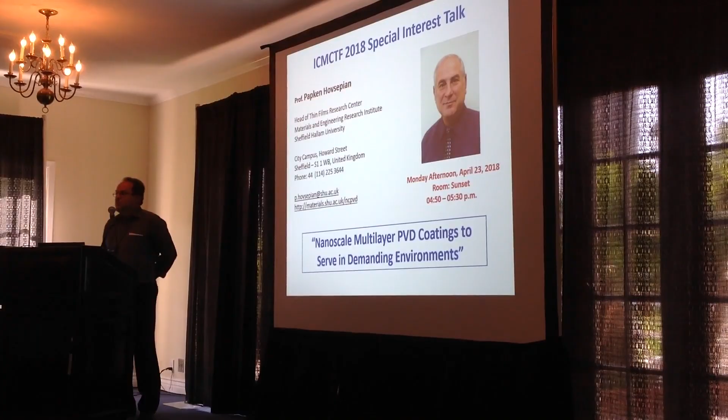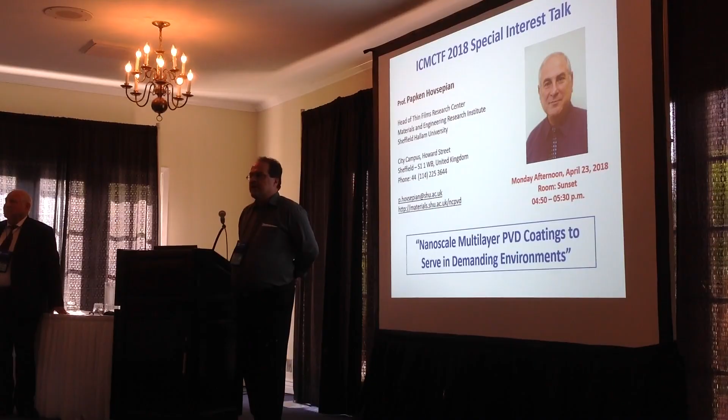Good afternoon, ladies and gentlemen. It's my pleasure to welcome you to this special interest talk to be presented by Professor Papken Hovsepian. I outlined this morning a little bit in the opening ceremony about these interest talks, a new feature at ICMCTF, and you will see if you follow us throughout this week what we mean with these talks. We have a diverse approach, multiple different talks and different topics.

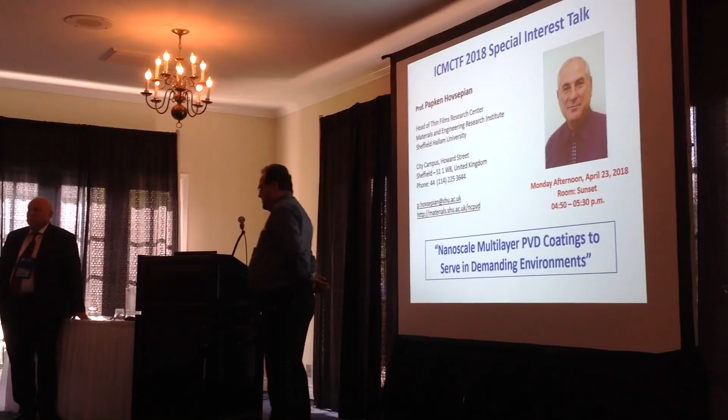And one aspect of these special interest talks is to highlight and recognize colleagues that have done pioneering work in fields of interest to ICMCTF, who have done outstanding service to ICMCTF and have an impact on our research community. And this holds absolutely true for Papken Hovsepian. Papken is truly a pioneer in physical vapor deposition. He has more than 30 years experience in this field. He has done significant work on cathodic arc evaporation, on magnetron sputtering. A special interest of his work was always the development of hybrid deposition processes, combining the different methods.

And I would say, in a personal estimation, his impact on the work on the pulsed deposition processes in the last 15 years, together with Harry, of course, and other colleagues, is significant, and pulsed deposition would not have reached the level it has today without it. Papken is professor and head of the Thin Films Research Center at the Materials and Engineering Research Institute in Sheffield Hallam University in England. And when he came in 1997 to this institution, he was very soon a foundation and solid rock on which other colleagues, and especially here in our field, Wolf-Dieter Münz, could build on.

And together, these two pioneers have published seminal papers on nanoscale multilayer thin films and superlattice thin films, on transition metal nitrides and other material combinations. And if you look on these papers, you will find that already 20 years ago, these colleagues, and especially Papken, anticipated a lot of what we talk about today regarding interface engineering in multilayer materials.

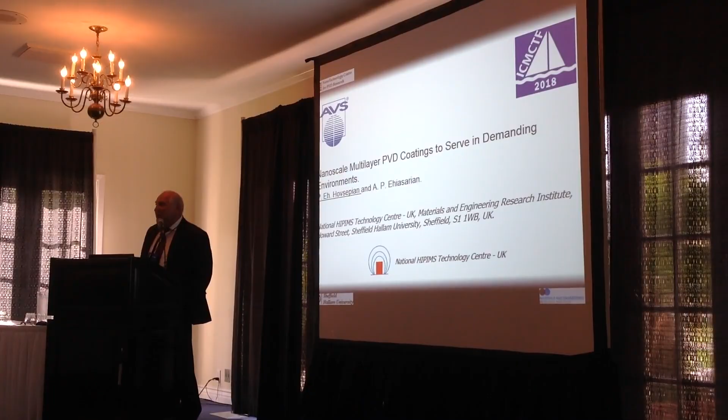I'm in the field 40 years, not 30 years. I was a student when I started with PVD for some reason, and it stayed with me all my life. So it is true that I always worked in the field of applied research, and I'm not ashamed of that. I like seeing results being implemented in industry. And what I will do, I will try in the next 40 minutes to keep you, of course, entertained, but also to show you the pain we went through to develop some of these materials, which were postulated a long time ago as super materials, and the results which we have achieved in this field.

So the title already says that these are coatings which will work in demanding environments, and the environments which I will touch include lead corrosion, room and high temperature oxidation and corrosion resistance, interaction with workpiece materials during cutting, and interaction with the human body. So it's a very wide range of environments, and one has to have a specific approach.

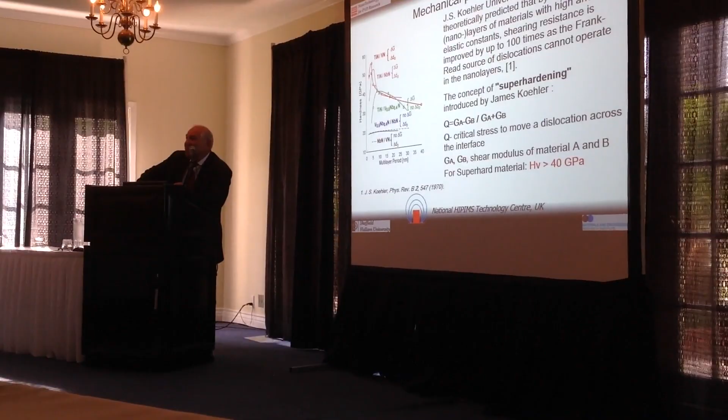Around 1970, I think James Koehler was the first person who introduced the theory behind the super lattices. And the theory was that if you marry two materials with different elastic constants, then you automatically create a barrier for the dislocation motion, and the energy they need to cross this barrier is proportional to the difference between the elastic moduli.

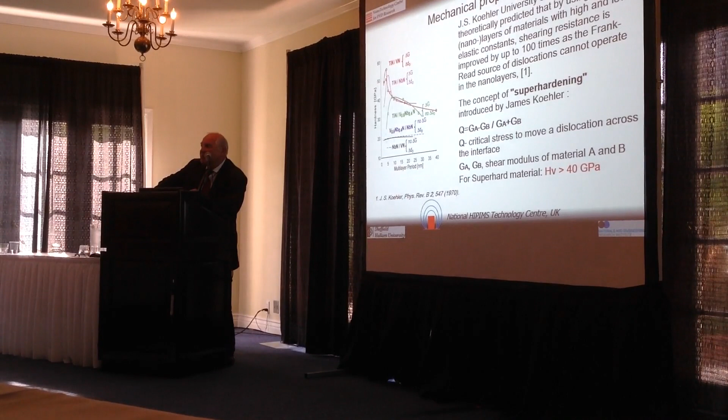So it was a really interesting concept because this gave in our hands the tool to manufacture man-made new materials. And it was demonstrated that a huge hardness enhancement can be achieved in a specific bi-layer period range.

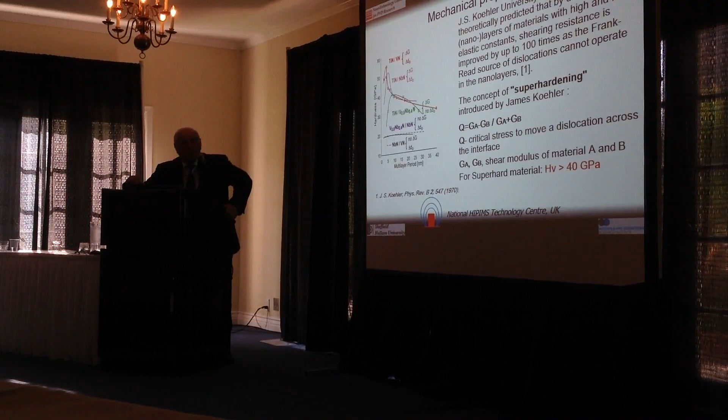Now this was the attraction for many years, and the goal was always to get harder and harder materials. The super hardness as a term was introduced, and everything which is 40 gigapascal was named super hard.

Now the theories which explain this, and there was a huge amount of research which I'm not going to touch deeply, but I selected just 4 very comprehensive theories which explain the hardening effect, starting with the Hall-Petch, which you all know, which was developed for bulk materials, but it can somehow apply in condensed materials as well, on vapor phase. Supermodulus effect was the next attempt to explain the hardening by claiming that you can have sometimes between 100%, 150% to 500% increase of the elastic modulus, and therefore you can get hardness enhancement.

The coherency strain effect was based on the fact that if you have two materials with different crystallographic structures, then you automatically create a barrier for dislocation motion, and therefore hardening effect.

But the theory which I really, all these years, liked most was the one which was proposed by Shinn and Barnett, and they were saying that depending on the thickness of the individual layers, you can have three cases: very thin layers where you cannot develop dislocations at all, so therefore your hardness is low; very thick layers where the material just behaves like an ordinary multilayer material; and the specific range of bilayer thicknesses where the dislocations will be generated in the softer material, but they will not be able to jump in the harder material, and therefore you get hardening effect.

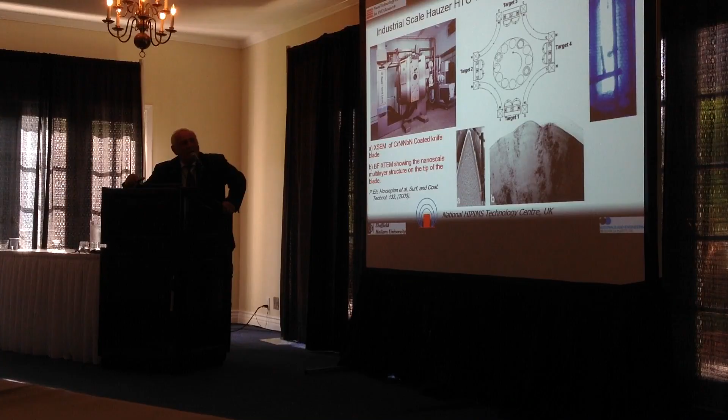This is a picture of a Hauzer machine, which we have in our center. It has 4 plasma sources. And if you furnish these 2 sources with one material and these 2 sources with another material, simply by sequential exposure of the surfaces by rotation to the fluxes coming from these 2 pairs of magnetrons, you end up with the layered structure.

In 2000, we were basically forced by industry to demonstrate that we can deposit with high precision these fine multilayer structures on 3-dimensional components. And this shows you a SEM cross-section of a scalpel blade coated with a coating, and in TEM you can clearly see, I hope you can see them, the light could be very different for you, but you can see the layer structure. So it was clear that we can put these coatings on a cutting tool, on a turbine blade, or whatever 3-dimensional component with very high accuracy.

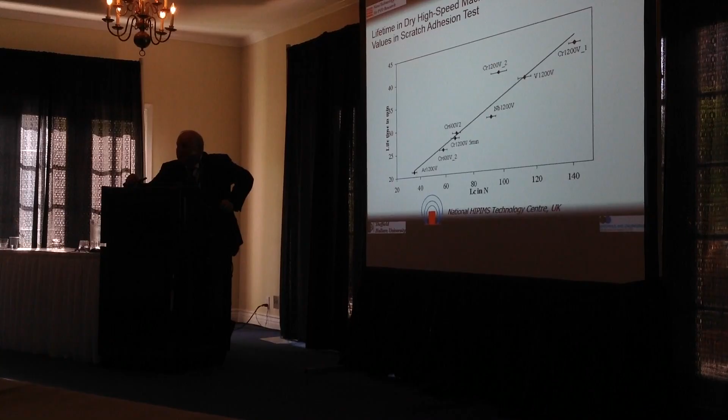What is very important to be understood for this type of materials is that because of their very high hardness, they're also highly stressed. So therefore, a good nanoscale multilayer coating or superlattice coating is a coating which is very strongly bonded to the substrate.

This is a published work which we did in our lab in 1998, I believe, where we showed that the lifetime of an end mill is proportional to the adhesion of the coating deposited on this end mill. And we used different approaches, different pre-treatment steps, different etchings, as we call them. Here's the argon etching, and here's an optimized chromium etching using arc discharge. You can clearly see that this is a very important parameter.

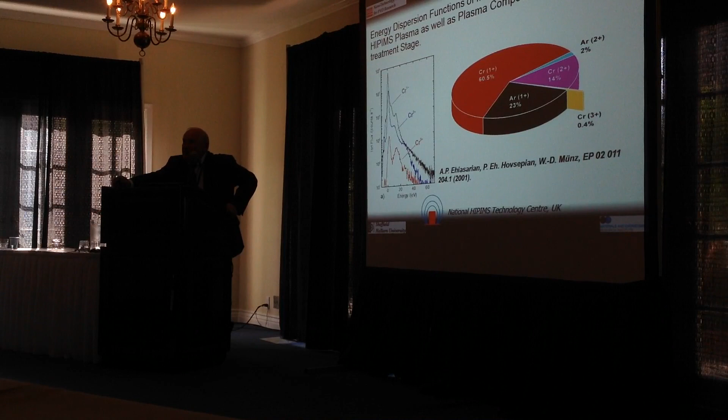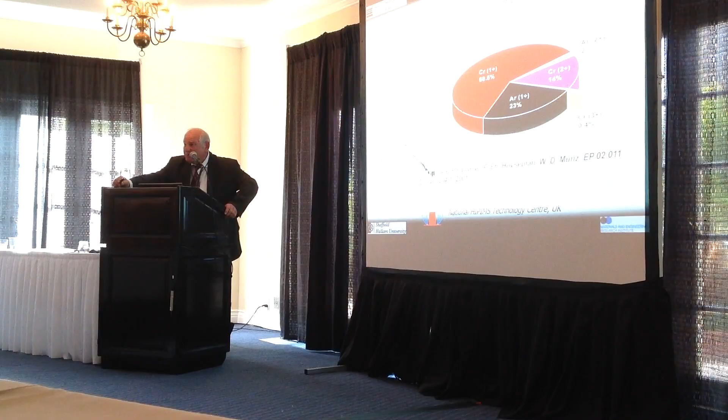And after the first papers on HIPIMS showing that perhaps this technology is capable to produce ions, we did some measurements, we found these ions, and I think in 2001 we patented the metal ion etching using HIPIMS. Now, you can clearly see the benefits of using metal ion etching by HIPIMS. If this is your substrate, this is your coating, and if you analyze the chemical composition of the interface after being bombarded with chromium ions, you find that you can implant this species deep into the substrate.

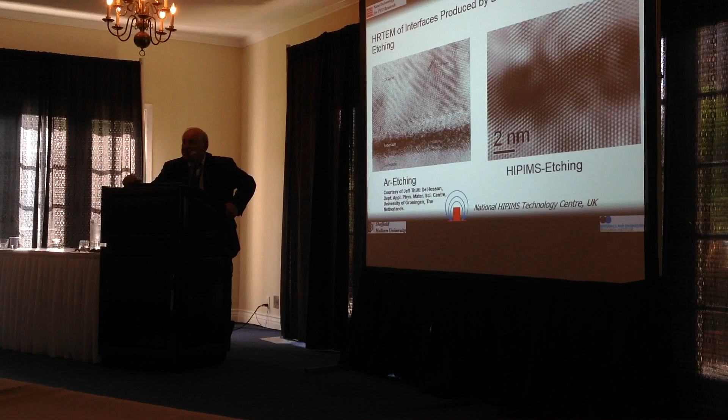And this has huge implications on the crystallographic structure of the interface. This is an interface which is prepared by argon etching. It's almost amorphized, it is highly disordered. And this is the structure of the interface after HIPIMS etching. This type of crystallographically perfect interfaces produced by implantation trigger afterwards, during the coating growth stage, local epitaxial growth.

The difference, because we were practicing metal ion etching with arc for many years, but the difference which we saw with HIPIMS was that we can have local epitaxial growth on very, very large areas of the substrate. Also taking into account that arc generates droplets, and if you take the time and calculate how much of the surface is actually covered by droplets when you use arc evaporation for pre-treatment, I will give you just one example. For titanium, it's approximately 19%.

These droplets are not metallurgically bonded to the substrate. They arrive here, they solidify, there's no bonding. So 19% of your surface is out from contributing to the adhesion strength. So therefore, it is no wonder that the adhesion of HIPIMS pre-treated coatings is higher than the one produced by arc. In both cases, we have metal ion etching. In both cases, we have local epitaxial growth, but here we have lower adhesion than using HIPIMS.

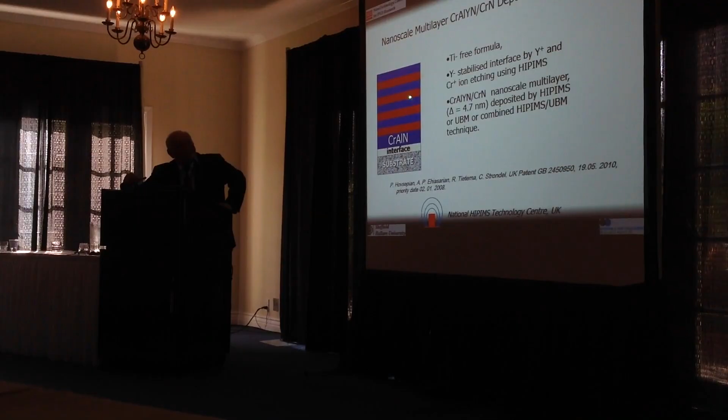Now, we had the yttrium concept a long time ago, stabilizing titanium aluminum nitride with yttrium for dry high-speed milling. But yttrium at that time was introduced in the coating. With this application, we decided to implant yttrium in the interface. And it was not possible to do it by arc because of very huge instabilities if you have it in the target and use arc. But it was very, very easy to do it with HIPIMS. So we have it in the interface with this coating, and we have multilayers which are based on elements like chromium and aluminum, which produce extremely dense oxide scales.

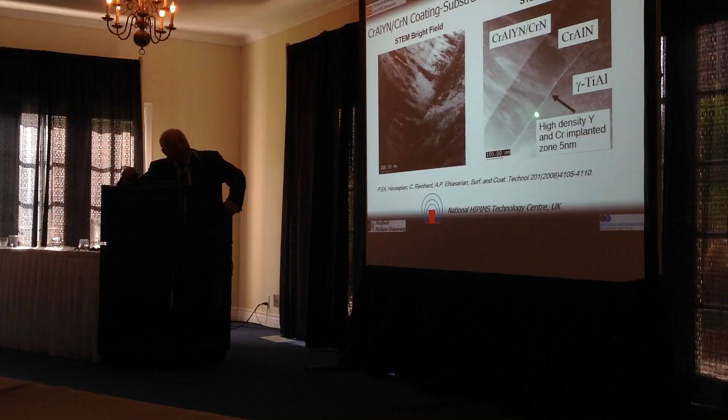Now, this is how the coating looks like. You have your base layer, the implanted zone, the base layer, and the coating. Very interesting properties. We saw the first sign and signature of oxidation after 850 degrees C. Hardness was retained up to 900, very high hardness.

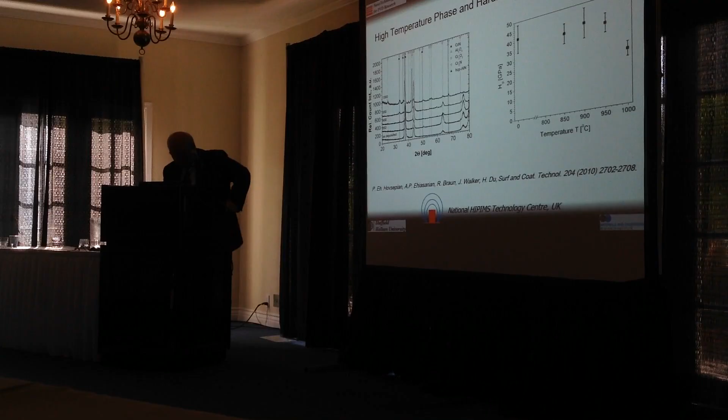Very interesting tribological performance. With temperature, the friction coefficient in high temperature tribological tests was reducing. This is very well understood because the oxides which form based on chromium are so-called Magnéli type of oxides, so they have low shear stress planes, and therefore the friction coefficient is reducing because you produce these lubricious oxides.

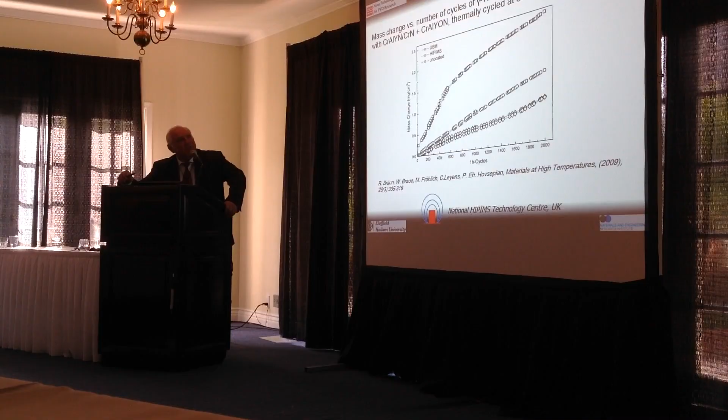The oxidation resistance was also fine. This is how the weight gain of the unprotected material looks like with time, and this is the weight gain when the material is coated. In this case it was gamma titanium aluminide. It was a special project to develop coatings to protect this new generation of future turbine blades, which need to be lightweight, and turbines with bigger diameters were needed. So we developed this coating for this application.

When you're in this business, it's always important that you preserve the mechanical properties of the base material. PVDs have always been excluded from the arsenal of coatings for turbine applications because of their porosity. If you deposit the coating on a turbine blade, if you're not careful, a crack will develop in the coating and will attack the substrate, and therefore you will lose the fatigue properties of such material.

What we found with this coating after fatigue tests: this is the fatigue strength of the uncoated material. This is the fatigue deficit when you use unbalanced magnetron sputtering and porous coating, and HIPIMS was producing only approximately 9% fatigue deficit, which was accepted by the aero industry.

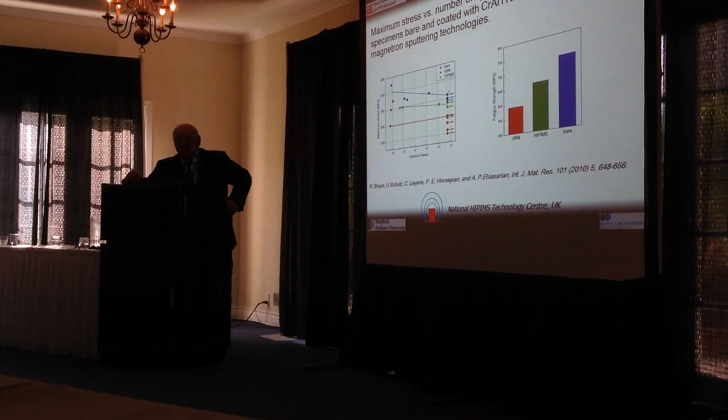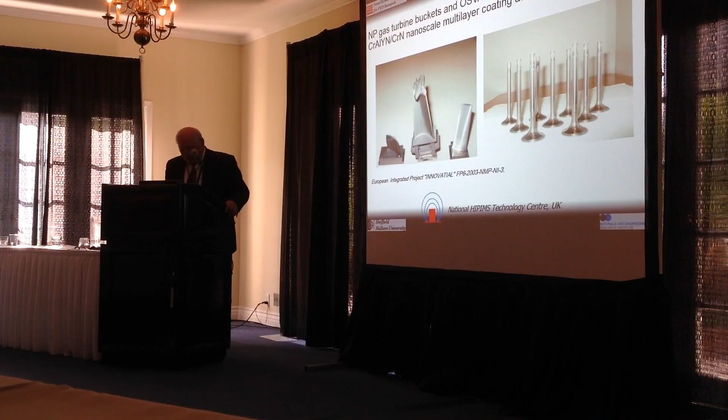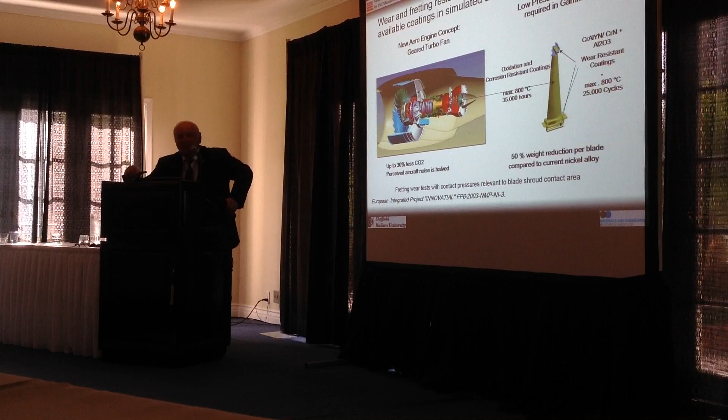So we coated within this project several types of blades. We also translated the coating for automotive components. And the coating was tested by MTU at that time. It was a very special cooperation between ourselves and Hauzer, because the final coating which really performed was a nanoscale multilayer from chromium aluminum yttrium nitride chromium nitride with a top coat of aluminum oxide deposited by Hauzer. So this combination did pass the test review.

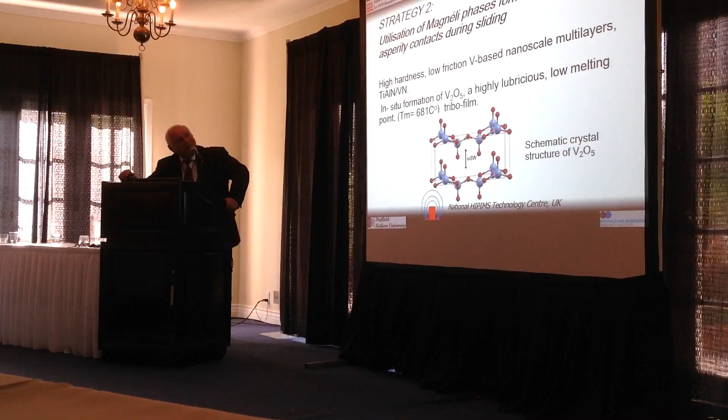Next problem and application was machining of developing of high hardness, low friction vanadium-based nanoscale multilayers, where the strategy was to utilize Magnéli phases which form in situ at asperity contact during sliding. You know that in tribological contact you might get up to 800 degrees C in the sliding contact. So therefore, if you have material in your coating which oxidizes, and if the oxide has a Magnéli type structure like it is demonstrated here, you can really reduce the friction coefficient by producing this lubricious oxide.

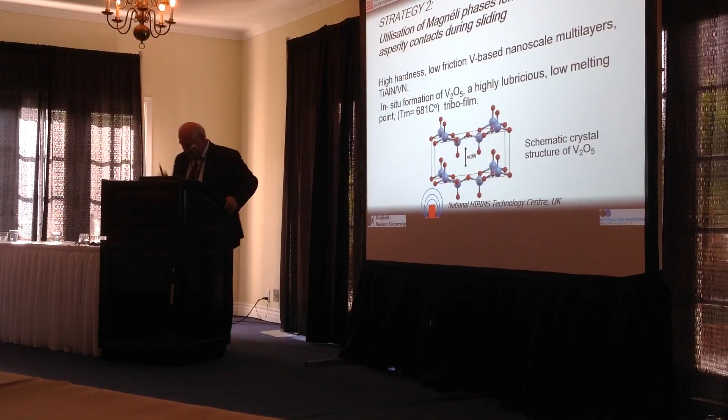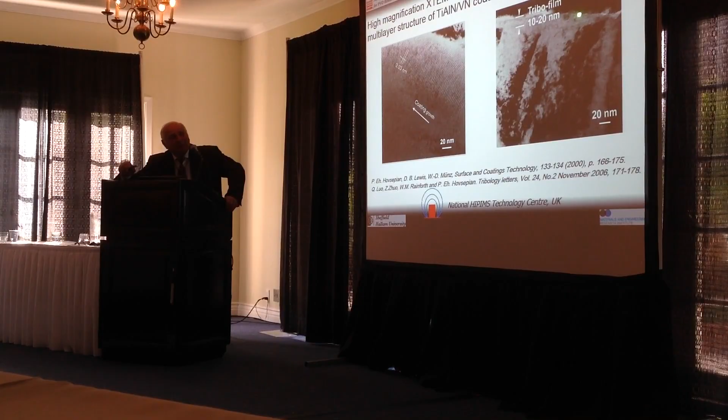With vanadium pentoxide, you also have a benefit of having very low melting point. So this is how the structure looks like. You form a tribofilm, 10, 20 nanometers. And if you go and investigate by Raman what is the phase composition of this film, it will be vanadium pentoxide.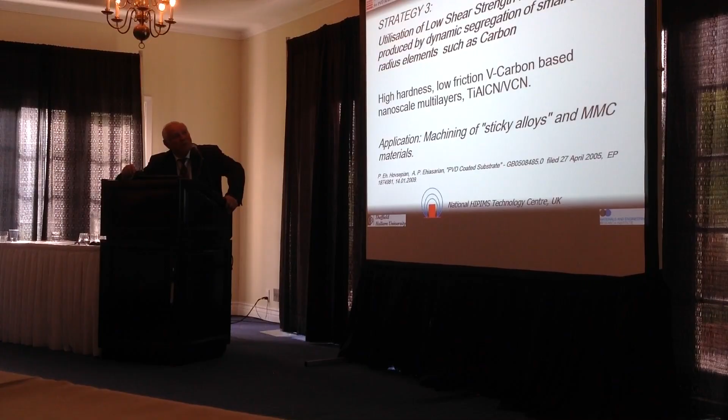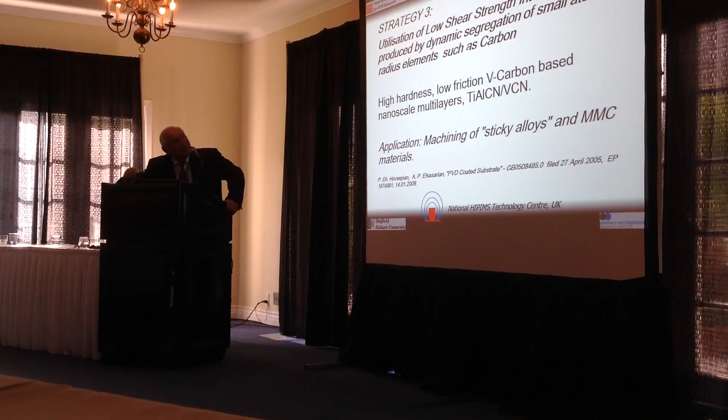With the next step, we modified this material by bringing carbon in it, and the strategy here was to utilize low shear strength interfaces, which are produced by dynamic segregation of small atomic radius elements such as carbon. So if you go to the literature, which was generated before the 90s, where people were very active developing theories about superlattices, you will always find the same claim. The interfaces must be sharp.

It was just Barnett who published a really nice paper saying, okay, but whatever we do, we have at least 1 nanometer intermixing. And then, knowing about these things, we said perhaps something can be pushed into this area of the coating, right at the interface between the individual layers, and change the whole wear mechanism of this coating. And this type of coating was under our radar because we wanted to machine sticky alloys, which produce huge build-up layers.

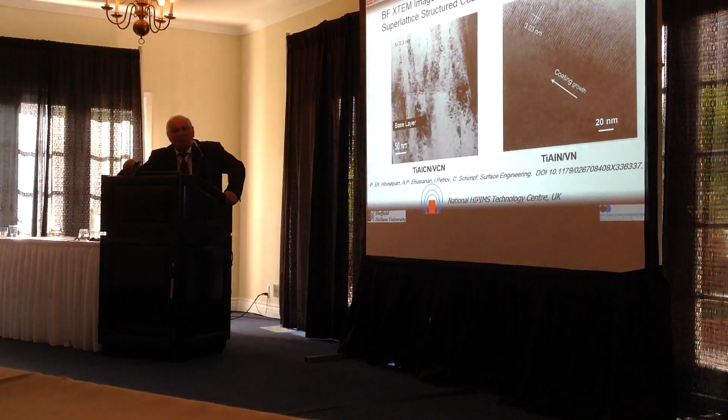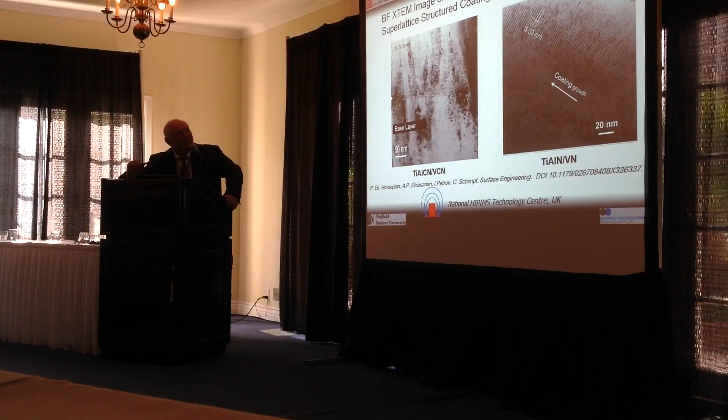And here's what happens. If you add carbon to the titanium nitride or vanadium nitride, it does segregate right at the interfaces. You see this. This is a carbon-free coating, and this is a coating which has carbon. And this is carbon. We have published this, we have studied this very carefully, so I have no time to show you all these results. But carbon is segregating at the interfaces. In machining of aluminum alloys, we saw that we can outperform the carbon-free version of the vanadium superlattice coating. We were much better than DLC.

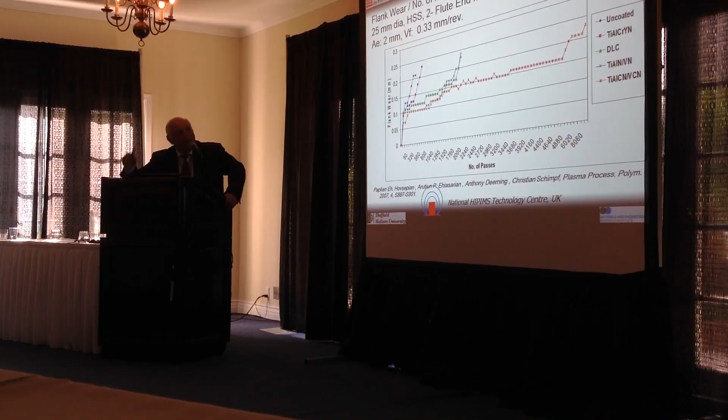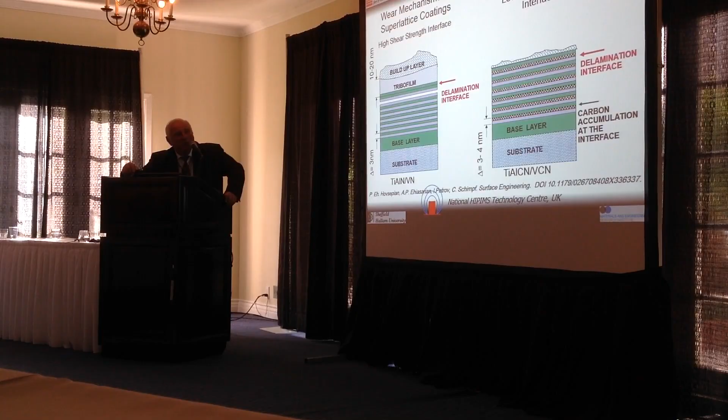When carbon is segregated in the interfaces, you are in a layer-by-layer wear mechanism, and this layer-by-layer wear mechanism is on nanoscale. So therefore, with this approach, you don't actually prevent the metallurgical reaction, because you cannot cheat nature. But you can produce a material which has a special tribological behavior.

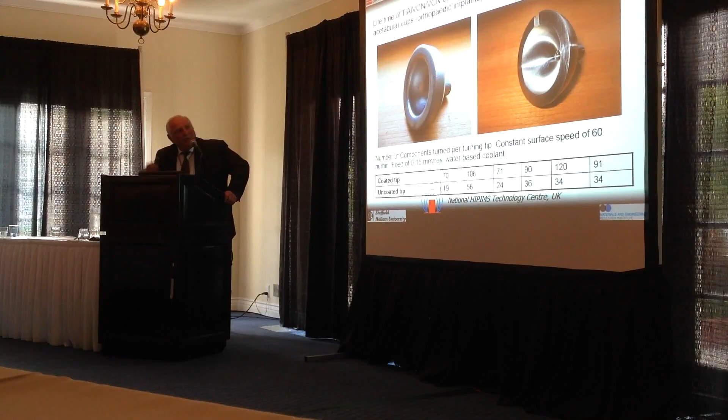But we were also very good in machining titanium alloys. And this is a case where we show that we can improve the lifetime of our tool by almost a factor of 3, by machining 3 times more components for medical implants. So we cannot explain these results by saying, okay, our coating is inert. Because if it is inert to aluminum, it definitely reacts with titanium. This coating has a different wear mechanism.

The fourth strategy and the fifth strategy, which I will explain, are around metal-doped carbon films. And here we wanted to use the high ion irradiation to achieve a very special growth, which is based on self-organized nanostructures and dynamic phase separation. So metal-doped carbon films have been introduced and patented by Dennis Teer. What we wanted is to find ways eventually to get new properties, a new type of performance based on the tools which we have in our hands, and this was the ion irradiation, just using different bias voltages.

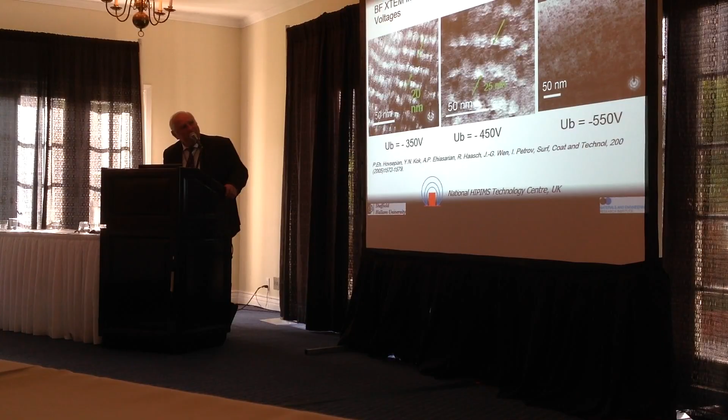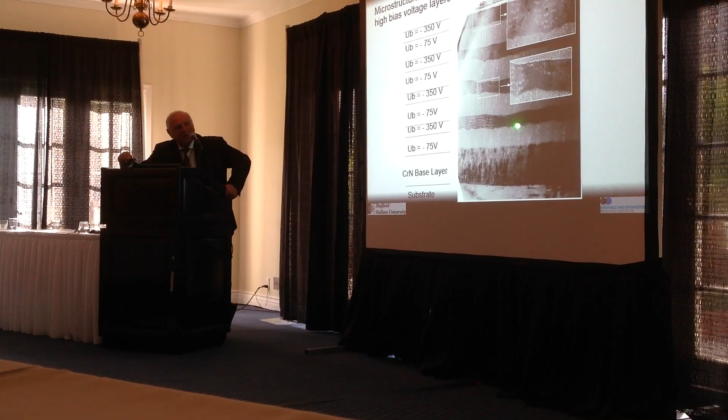And you can actually show this very clearly based on the irradiation effects, because this sample was produced in one deposition run. Half an hour the coating was deposited at 75. In the next half an hour, 350. You reverse it to 75 and you reverse this structure. It is very reproducible. You can see all the signatures of the ion bombardment. Low ion bombardment: you can see the tops of the columns, very rough surface. High ion bombardment, this is the end of the cycle, very smooth surface because of the resputtering. And you can clearly see that you can just switch from amorphous to this layered structure absolutely accurately.

Application was coatings on, I will call them, fine blades. This is just the cutting edge. This is a cross section, very high aspect ratio, very sharp blades, which reduce the cutting forces and increase the lifetime of the blade.

Strategy 5, again metal-doped carbon films, where we wanted to utilize the thermochemical reactions to achieve in situ formation of lubricious phases in conditions of boundary lubrication. Application was low friction, highly resistant tribological coatings, which need to operate at boundary lubricated conditions, but at elevated temperatures. It's a coating where we doped carbon with molybdenum and tungsten. I think we patented this solution. This is the typical structure of such coating.

And what happens is that these two elements react with the sulfur in the oil, and they produce low shear strength phases like MoS2 and WS2. This coating shows a really very low friction coefficient. These are all DLCs.

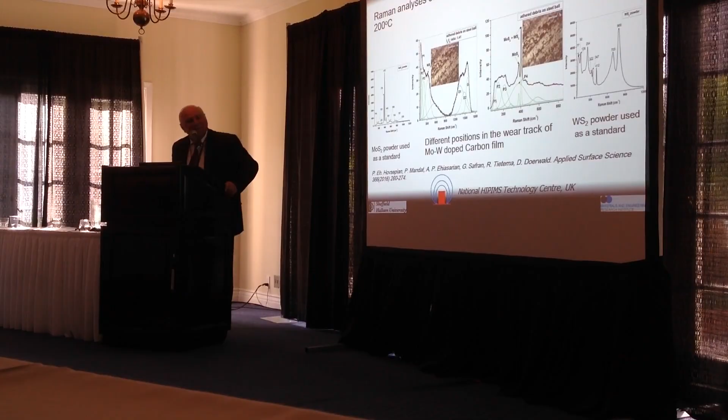The formation of the MoS2 and WS2 in situ was confirmed by careful analysis of the wear debris after lubricated test at 200 degrees C. And you can see the spectra here of the wear debris. And here, these are the spectra of these two compounds in pure powder condition. We can clearly see that these lines correspond exactly to the powders which we use as control specimens.

What was the big difference between the behavior of these coatings and the standard DLCs was their friction behavior with time. The standard DLC was having initially very low friction coefficient, but with time it started increasing because at these high temperatures you start getting graphitization and the friction behavior

deteriorates, whereas with the molybdenum tungsten doped carbon films, the friction behavior is completely different. The friction coefficient does reduce because you generate more and more of this superficial phase with time.

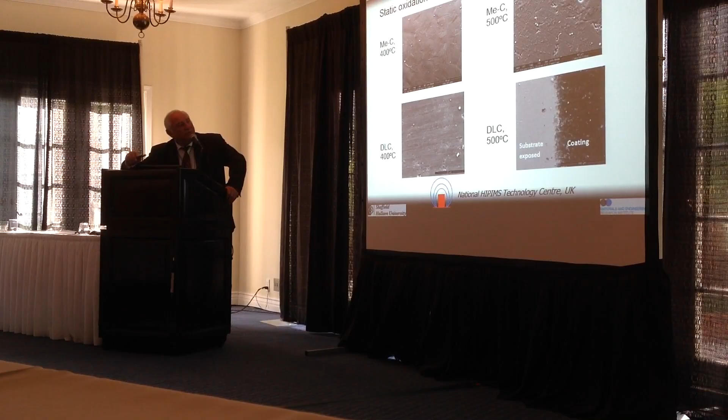Applications here. I just wanted to show this also. The test at 500 degrees C: standard DLC coating is almost evaporated here, and this coating is still intact. So the goal was to produce a coating which withstands high temperatures. And this is the demand from the automotive industry because of the increasing loads, the reduced size of the components. So the load conditions are really very demanding, and you really need this type of coatings if you want to deliver in this application. That is just to show how some components with these coatings look like.

And I'm with the last strategy, where we used highly electrochemically stable metals like niobium combined with chromium as a wear-resistant material to produce wear-resistant and electrochemically stable corrosion-resistant coating. So this work was carried out in an attempt to replace hard chrome. So this was the idea.

And we have three very interesting applications with this coating. Corrosion and wear resistance in wet corrosion application, corrosion and wear resistant coating which protect components in steam turbines, so this is another demanding application, and as a coating for medical implants. It was easy to demonstrate that potentiodynamic polarization behavior of this coating is much better than stainless steel.

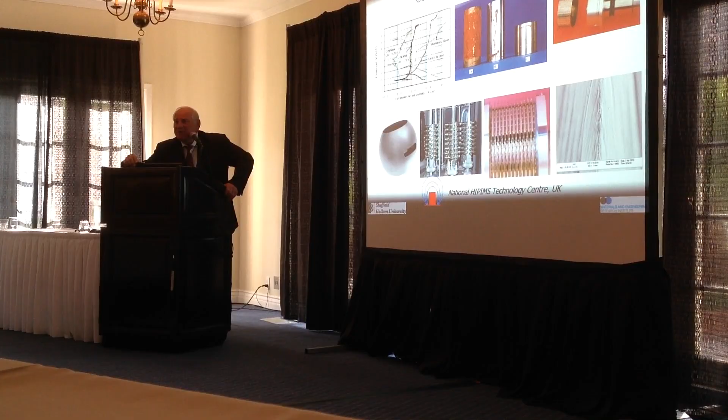But the real final test to approve this coating was coming from industry, and this is a salt spray test. Whatever you do, they want salt spray results. And this coating can withstand 1,000 hours when it is deposited on stainless steel, and 500 hours when it is deposited on mild steel. The industry requires 300 hours when it is deposited on mild steel. So this coating went to several applications.

These are components for textile machines. These are components from automotive industry. This is a ball valve which is used in the petrochemical industry. Deposited coatings of this type improve the lifetime in all these applications. Steam turbines, very aggressive atmosphere. This is just a picture which I drew from the internet just to show how terrible this surface looks like.

But when the coating is deposited on the turbine steel, this is the weight gain with our coating, this is the weight gain of the P92 substrate without protection. And these are coatings, actually this one is 80 micron thick coating, which is a very complicated alloy. And this is a coating produced by BAM, which is an oxide layer, so we were surprised that we can actually outperform this type of materials with our coating.

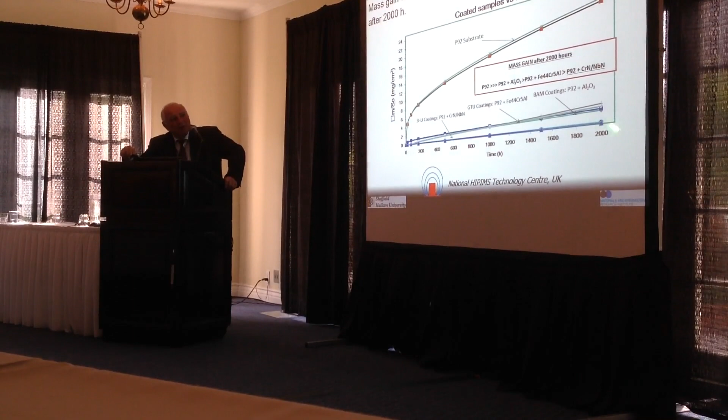We started looking much closer at what we do to the substrate where we deposit coatings. So it's a high temperature tensile strength test where we saw that actually the tensile strength of our specimen was improved after depositing this coating rather than deteriorated. I put these two pictures which are actually coming from this type of test after the observation of the specimens for those who are really interested in the adhesion problem.

That is a specimen which has been stretched in this plastic zone of the material. You can see a few cracks because these are huge elongations and you have a ceramic coating, but the coating is still here. It hasn't been delaminated.